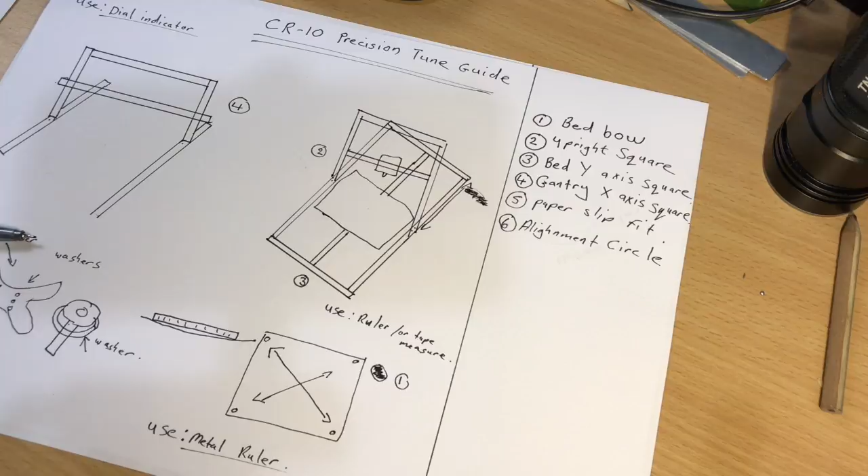Now there's a couple of things. I do have a CNC background. I've designed and built CNC machines, CNC routers, so I'm new to the world of 3D printing. This is my first 3D printer, but the same tolerances that apply in the world of CNC routing or CNC milling apply even more so to 3D printing, because here you're working with layers of 0.15 of a millimeter. So everything has to be just right in order to get perfect prints. So let me explain to you what I did, and hopefully this will help someone out there.

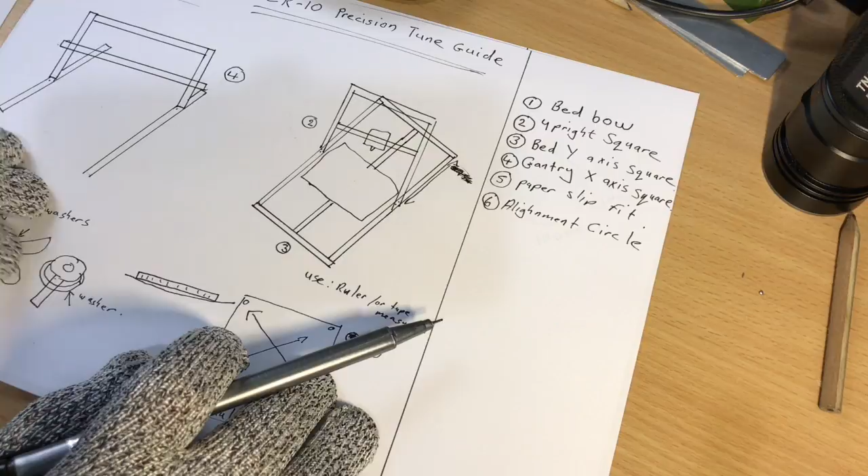So what happens is, when you get the printer, they're so popular that they're being put together very, very quickly and shipped out as fast as possible. So they're not paying much attention to precision of the machine when they ship it out. So that has to be tuned after the fact. Also, when you assemble the machine, you can't just assume that you're going to screw everything in and everything's going to be perfectly aligned. So you have to measure this. So let me go through all the things I did to fix the machine, and if you follow this list, I'm sure you will have a perfectly aligned machine capable of printing almost to perfection. So let's start with what I did.

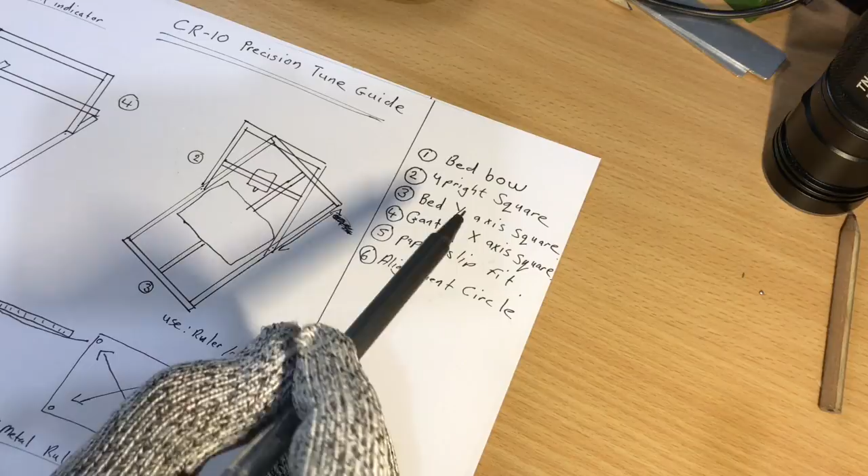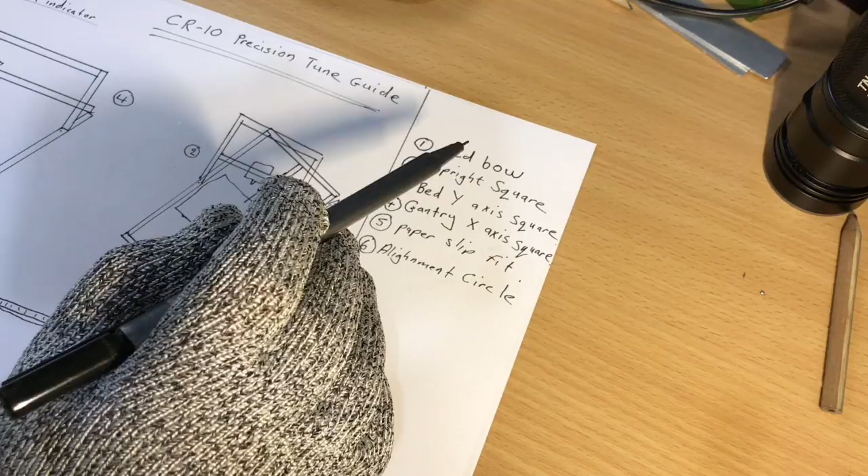Okay, number one, the bed bow. So I'm sure a lot of you have realized that the bed isn't flat, or you think the glass isn't flat, or you go out to buy mirror tiles. I suggest you use a mirror tile from IKEA because it's absolutely flat, but if your bed underneath it isn't flat, there is still going to be distortion on the bed when you use the clips. So it's very, very important that you get the bed straight.

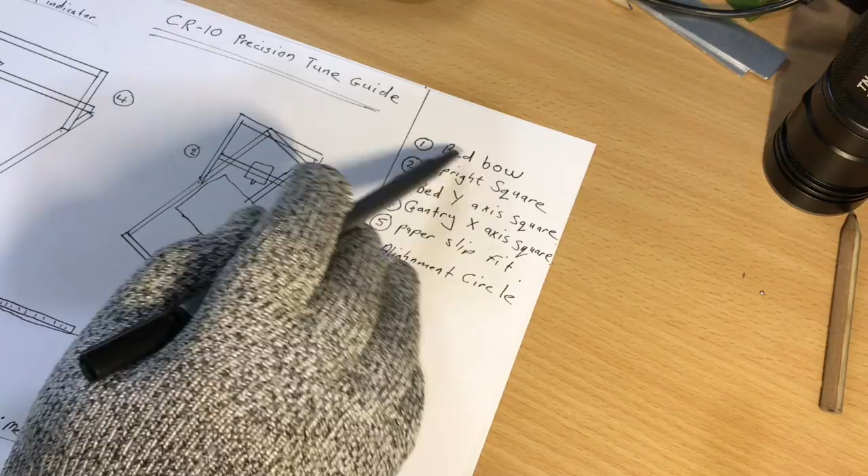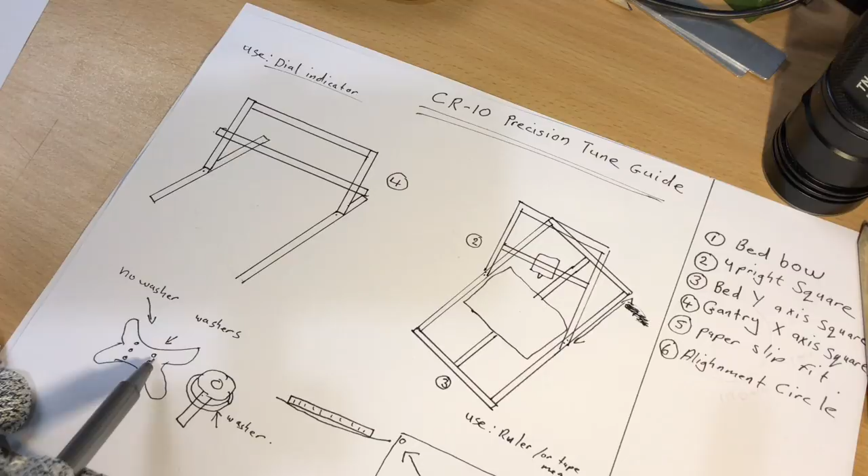So what I did is I first took off the aluminium heating plate, and I looked underneath, and on my machine, I'm sure your machine is different, but mine had been assembled so quickly. Underneath the plate there is this bracket that the rollers screw onto. I don't know if you can see that, but here's your center beam, and then you got your rollers underneath that screw onto it. Now on mine, there's 6 screws, 3 on the left, 3 on the right. On mine, there were no washers on the one side underneath the screws, and the other side had washers. So now you are introducing a little bit of imbalance into the system already. You got different tensions from different sides.

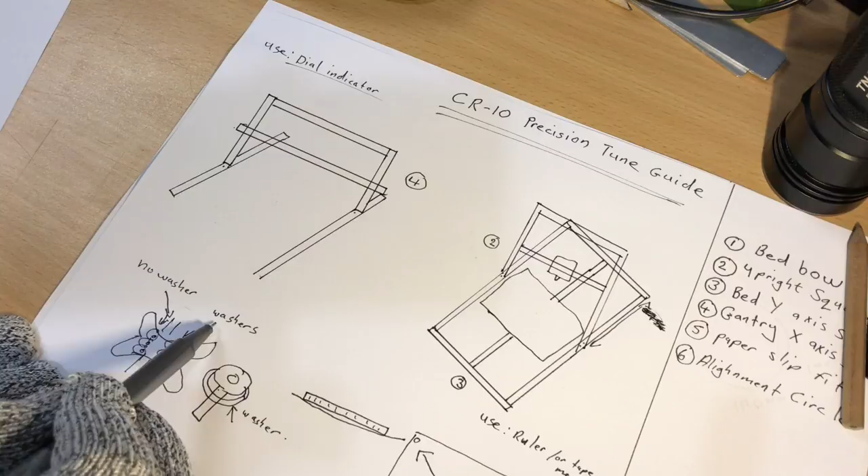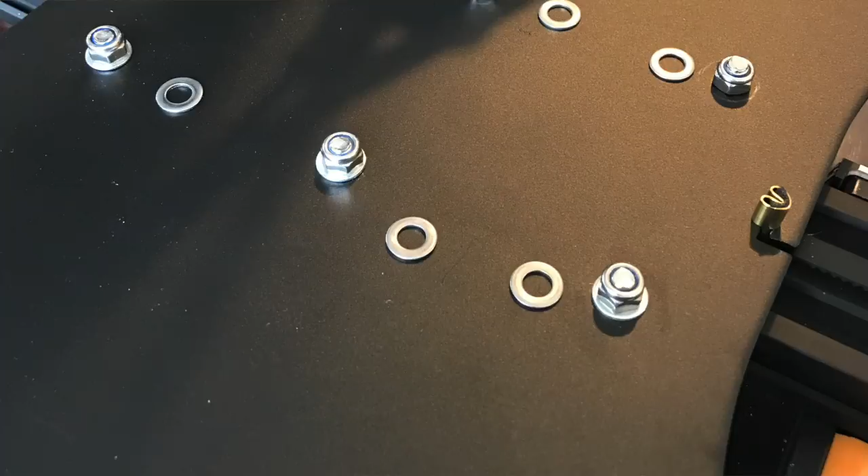So what I did is I just took the screws out. I got my own washers, and I knew they were all exactly the same size and height. And then I put washers under all of the screws, and I put it back on again. Then I moved on to, we'll do number 3 before number 2 actually. We're still on number 1, the bed bow.

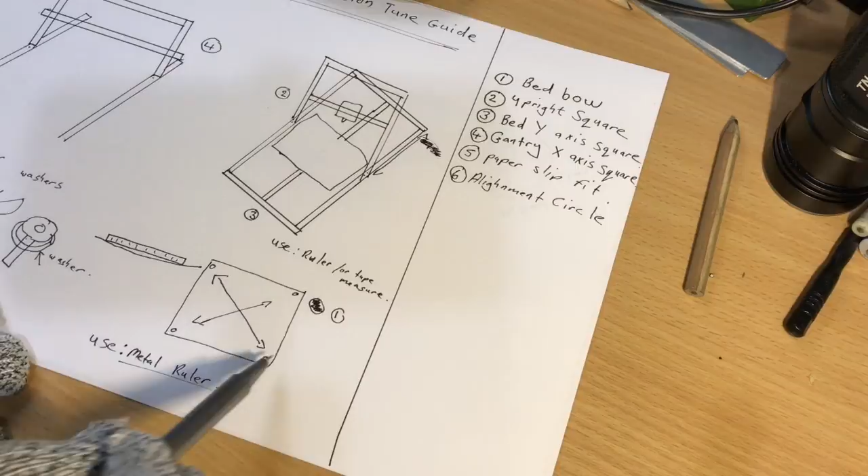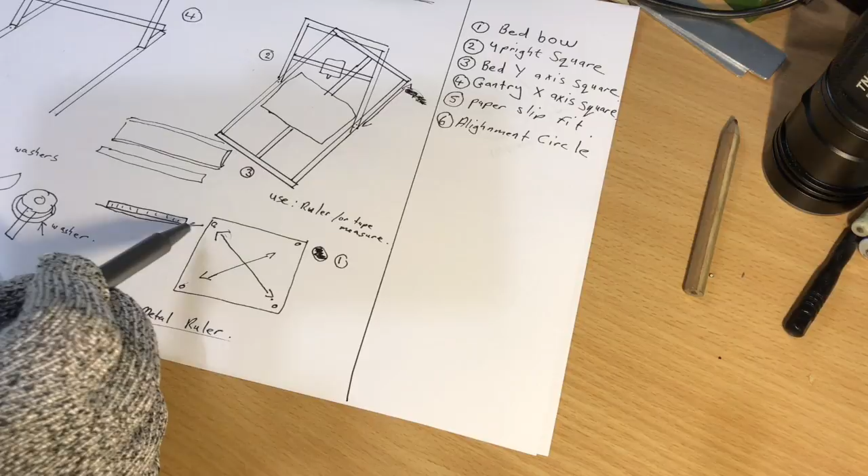So what I did is I put it back on, and then you take a ruler. It's a metal ruler that's perfectly flat, and you put it on its side, and you look for a gap underneath. You place the ruler, this is the way I did it, from one corner to the opposite corner, like that, and you shine a light underneath it, and I can guarantee you that your bed won't be flat. So you'll see that there's a gap underneath it, either like that, or you might actually see something like that, but probably the first one, because these screws over here have different tension. If one is putting more tension in one corner than the other, then you're going to have a distortion on the bed.

So what I did is I put a little bit of tension. I made sure that I turned the screw the same amount. So two turns, two turns, two turns, two turns to get a bit of tension into the system. And then I used the ruler test. And while the ruler was on the bed, I adjusted the screws until I saw that the ruler was touching the bed perfectly and there was no gap underneath. So that's what you want to see. And you want to see it in that direction and in that direction and in that direction. Then you know your bed is flat. Alright, so that's very important to do.

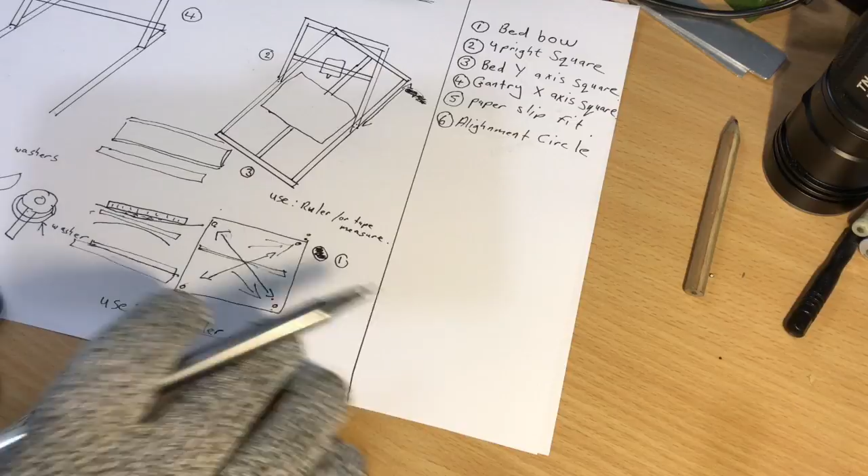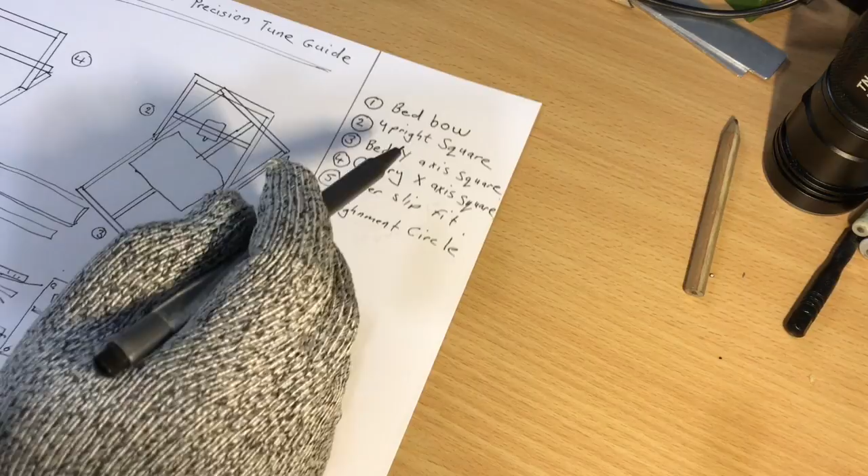Then I moved on to actually squaring the machine. Now I can't assume that this machine is square as it comes out of the factory. And so this is what I do. So number 2, upright square. So this upright over here is screwed in. You screwed it in yourself over there and over there.

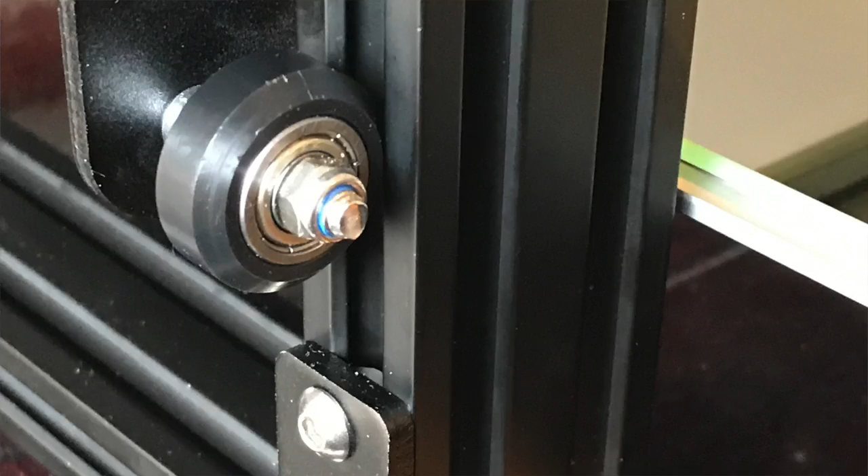And what happens is that here's the screw, and you of course are using your screwdriver from underneath and you're screwing the upright. So these holes aren't exactly perfect. There's a bit of slop in the holes. There's a bit of tolerance.

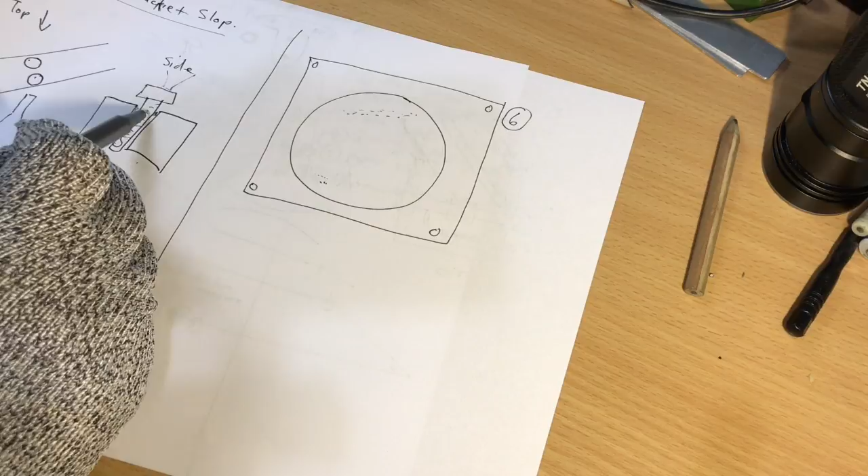So if you look at the holes, and this is the same for the brackets, if you look at the hole, there's a little bit of space on either side of the screw, and if you just happen to tighten this down, there's no guarantee that you're going to get this perfectly in the middle, and you're probably going to land on tightening a little bit more to one side or to the other. And the same with the brackets.

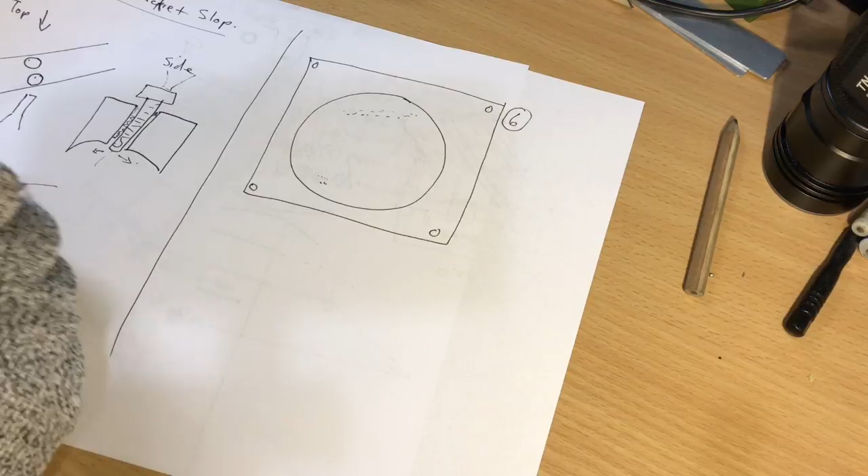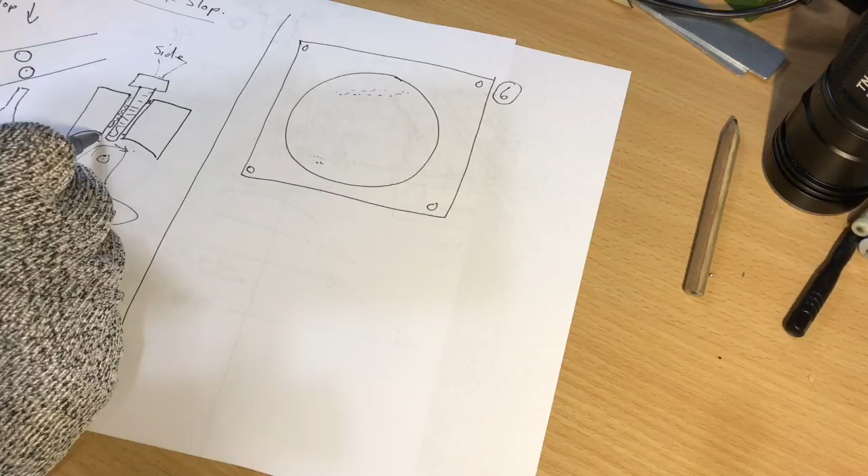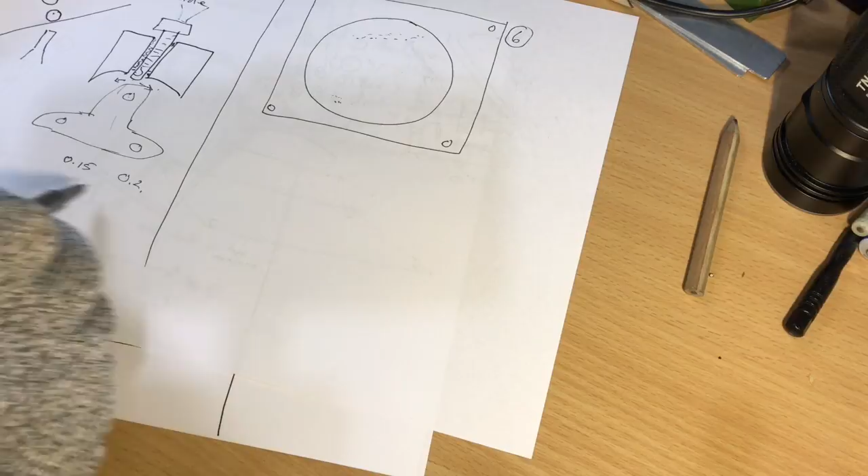So if you got your, just excuse my drawing, it's very crude, but there's your bracket, there are your holes, and the same thing happens on your bracket. So it's very possible when you put the machine together that you're going to have it one way or the other. Now, because we're working with very small tolerances, let's just say 0.15 of a millimeter, if this play here is 0.2 of a millimeter, that can throw your whole machine out, just not putting this in properly and getting it square.

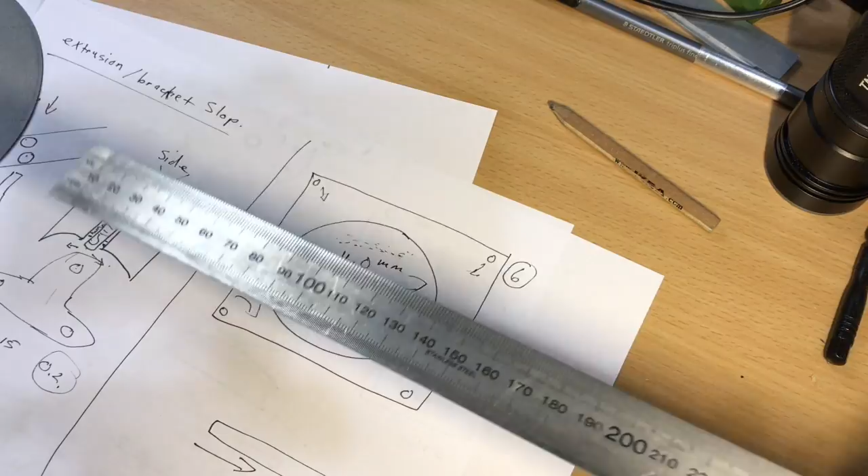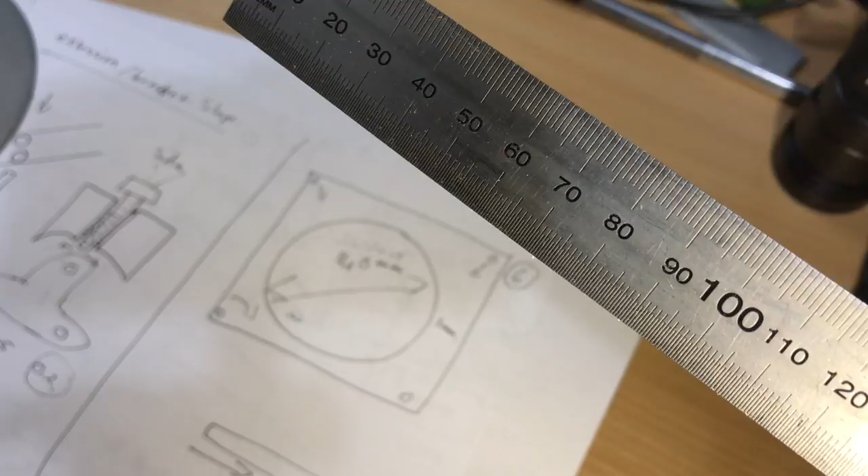So before I loosened the one side, I took a ruler, preferably a ruler that shows half millimeters on it. So this is the ruler I used. You want a metal ruler, and you can see here it's got half millimeter increments as well. So you want to use something like this that's flat for your bed, so you can see if there's a light gap underneath, if there's any bow in the bed, and also to measure the distances between the extrusions to make sure it's square.

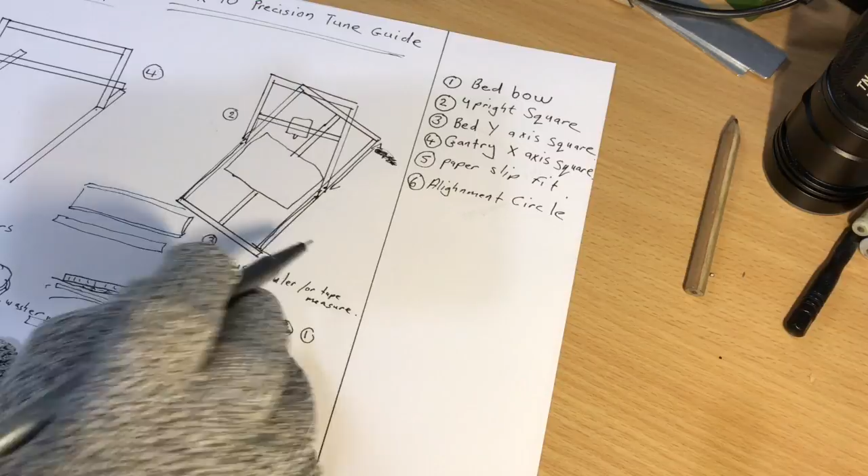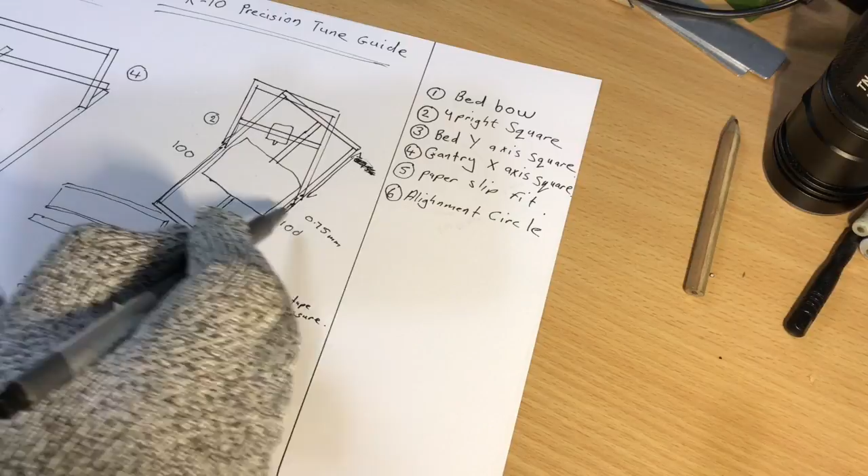And you want to measure the distance from the very edge of this extrusion, if you can see that over there, to the very edge of this upright on that side, and then on this side. And you'll take your measurement. So let's just say this is 100. You want this distance also to be 100. Whatever it is, you want them to be the same. Now on mine, I was out over here by 0.75 of a millimeter, which is a lot. So I fixed that, got them exactly the same distance apart.

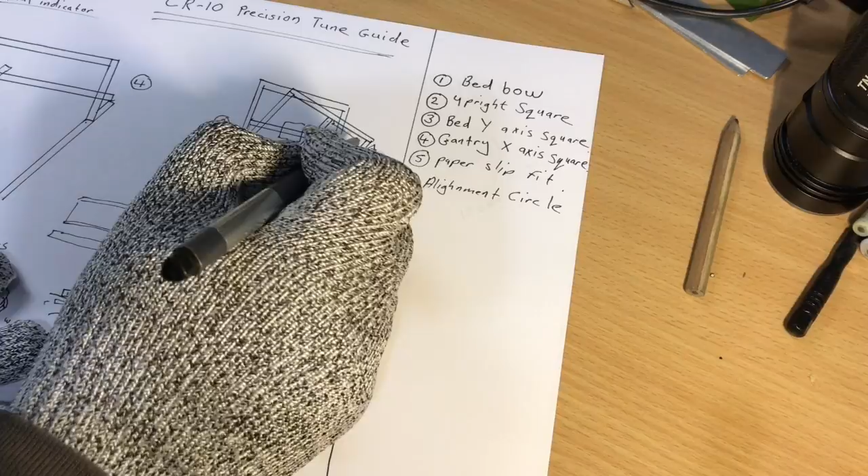And then I did the exact same thing from this middle beam to there, and the same thing on that side, middle beam to there, and let's say that was 50. You want that also to be 50. On my machine, mine was out by 0.83 of a millimeter, so I fixed that.

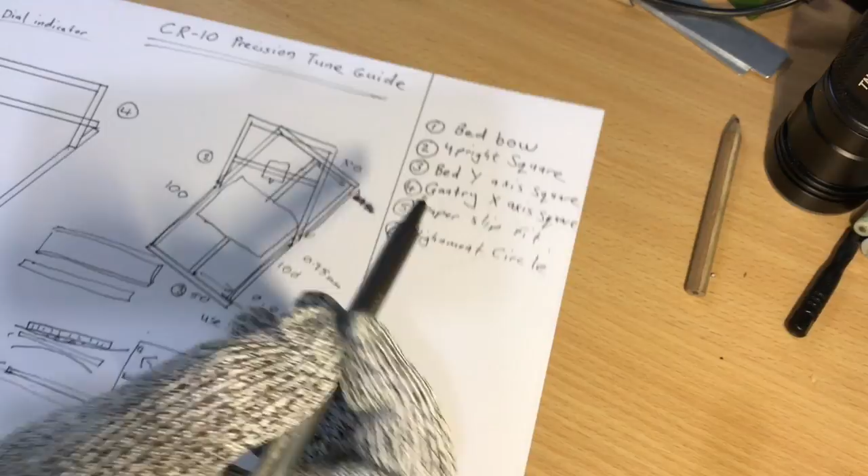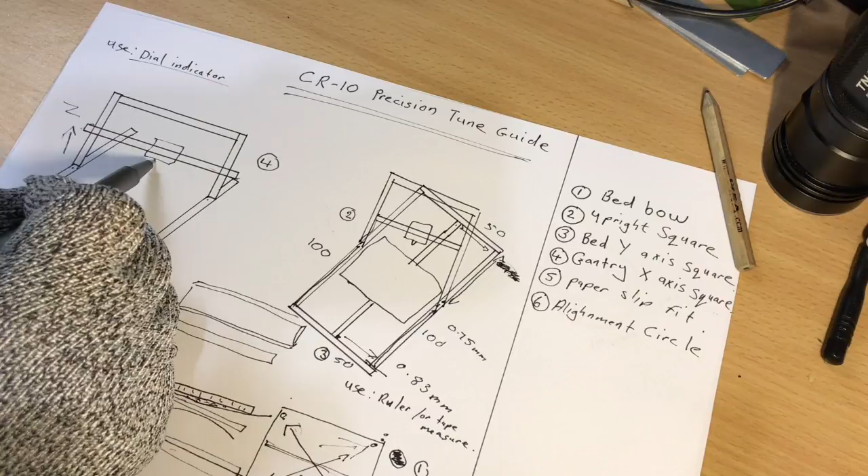Then the next thing you want to check, this is very, very important, is your gantry x-axis square. So over here you've got this beam that rides across, and this beam moves up for Z, and your print head moves left and right for X. And it's vitally important that this is parallel to your bed.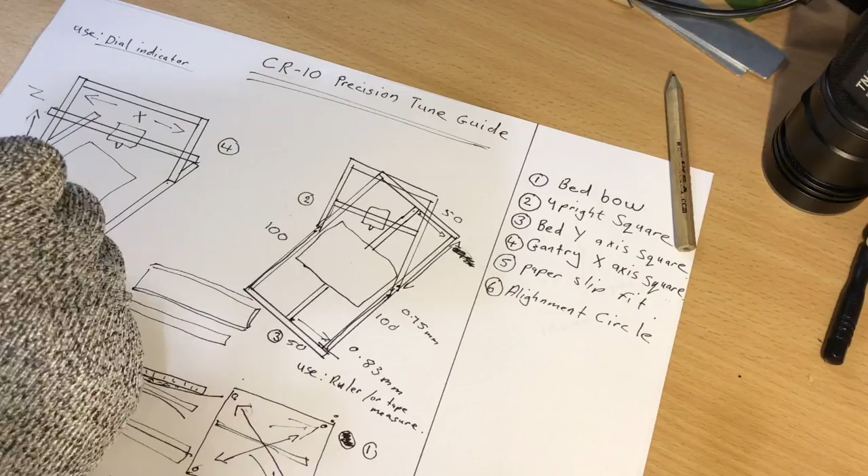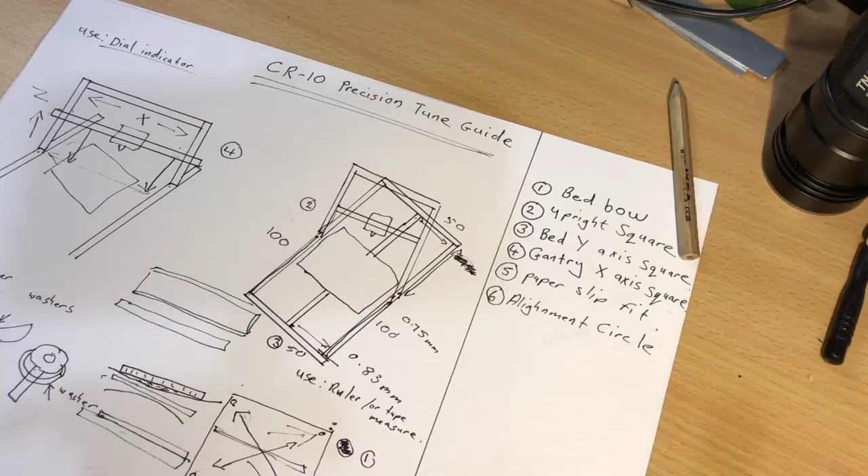So when this print head moves from here to here, and we've adjusted your bed to be flat, you want to have the exact same distance from there down to the bed as you have from there down to the bed. You won't be able to measure this with a ruler. The way you measure and fix it is with a dial indicator, if you've got a dial indicator.

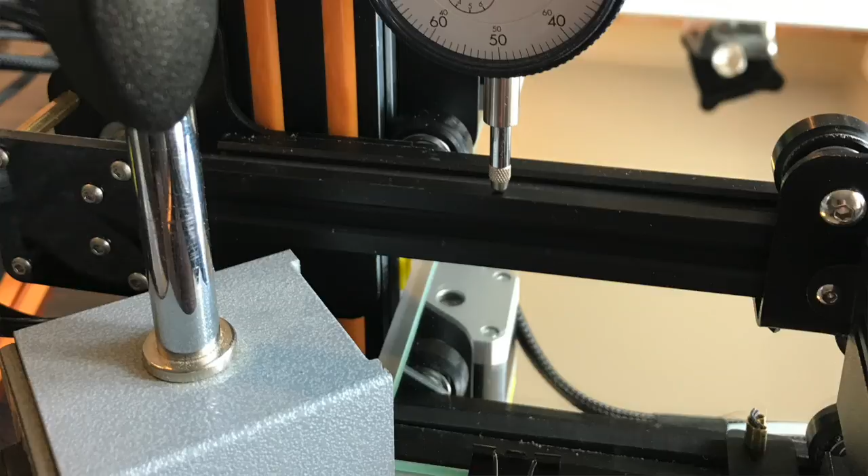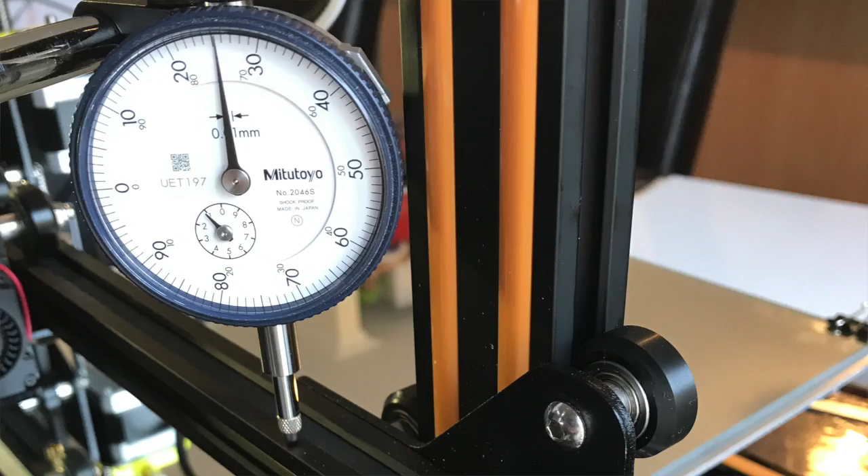So you put your dial indicator, they normally come with a magnetic stand. You can't use it on aluminium since it's not magnetized, but you try and strap it down with something heavy, or you position it where it's not going to move, and you put the block over here, and then you position however your stand works. Here's your dial indicator, and you put the needle on top of the beam, if you can see that, and you get a measurement on the one side.

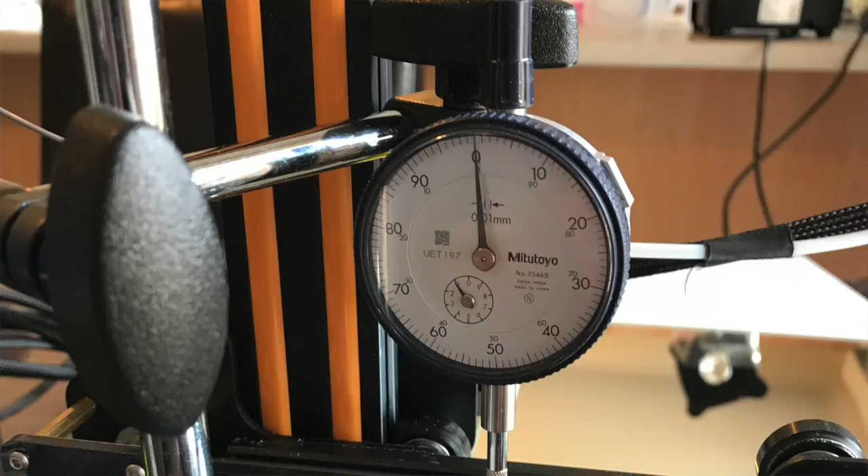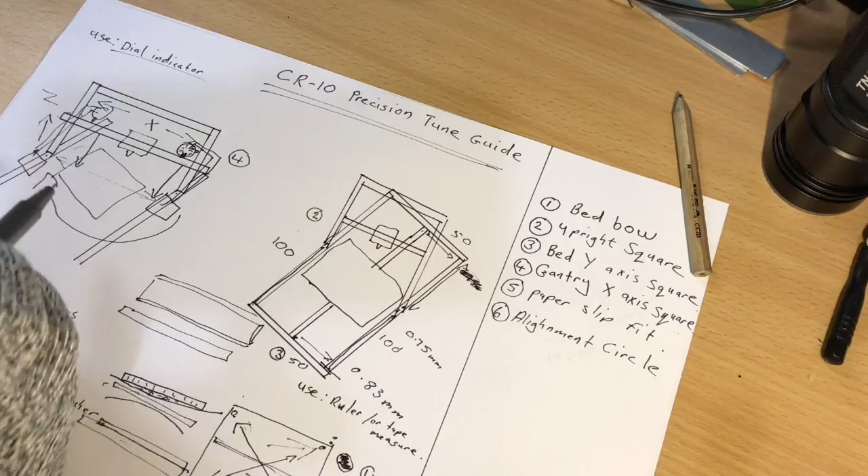So you put some tension on that needle, you zero out your dial indicator to 0, and then you take this same setup, you move it to this side, you put your dial indicator on this side, and then same thing. You see what measurement you get on this side. Now whoever assembled this machine at the factory was out by 1/5 of a millimeter.

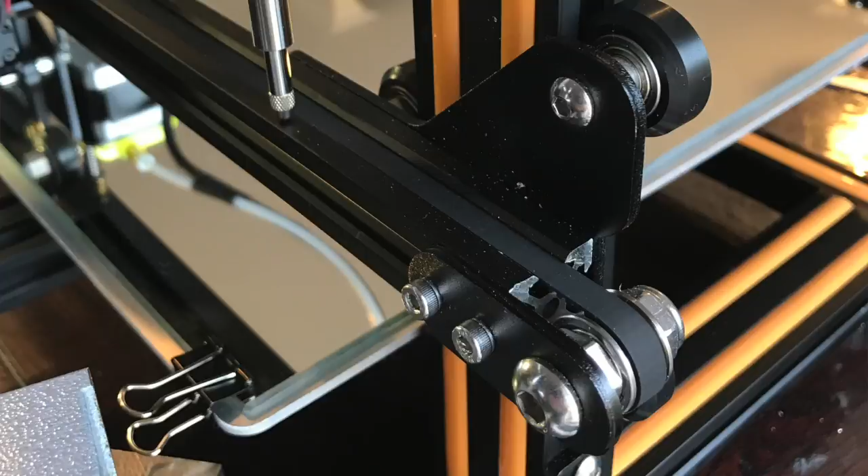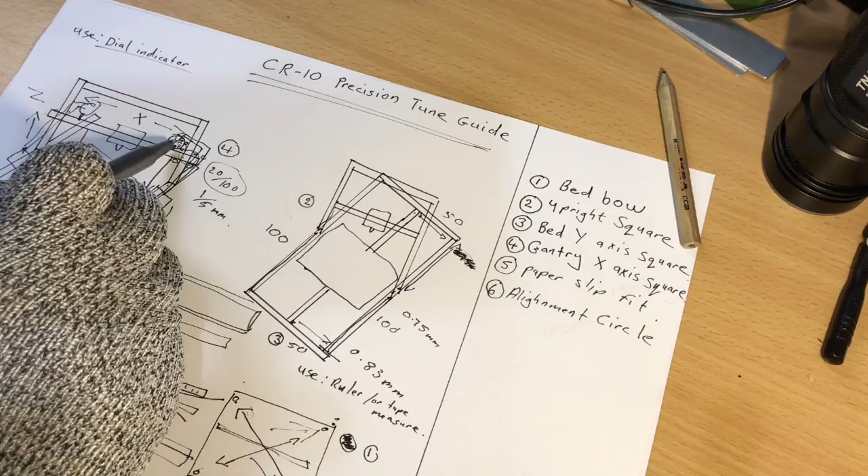So the way I fix that is on this beam over here, there's T-nuts that you loosen. There's 2 T-nuts and a bracket, and there's eccentric nuts for the wheels, and you basically get this into position. You tighten it semi-tight until you get this to 0, or as close to 0 as you can, and then you slowly tighten this up, each screw a little bit at a time, till you get this as close to 0 as possible. The best I could get these two in parallel was 5/100 of a millimeter. That was the best I could do on my machine.

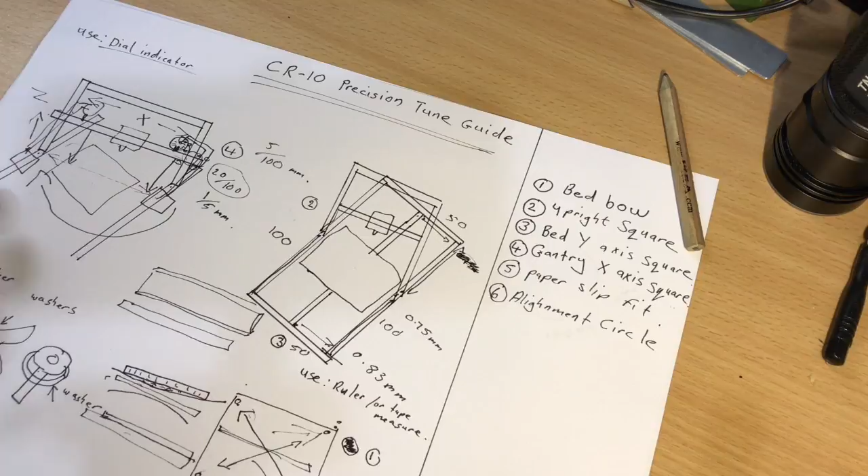You might have better luck on your machine. It all depends on how precisely the hole's been drilled through the aluminium extrusion, and the play in your bracket and your wheels that ride on the gantry.

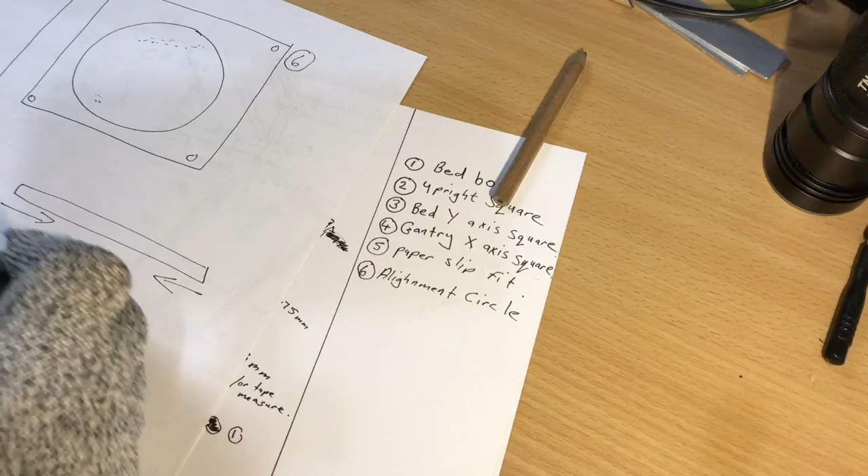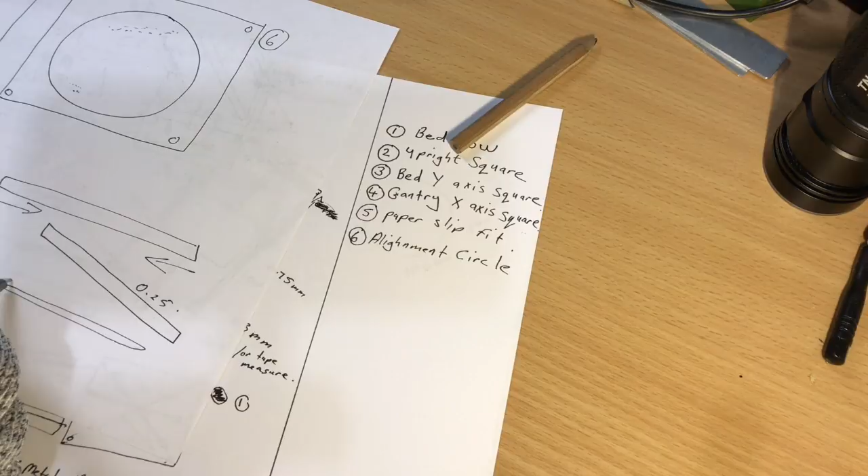If I've got layer heights of 0.15 of a millimeter, and you just draw it here, and here is the beam, and from left to right there's a slant like this, I'm exaggerating, of 0.25 of a millimeter, then when you're trying to put one layer on top of the other and the next one's coming down, you're going to land up with something like that. So that's vitally important that you fix that.

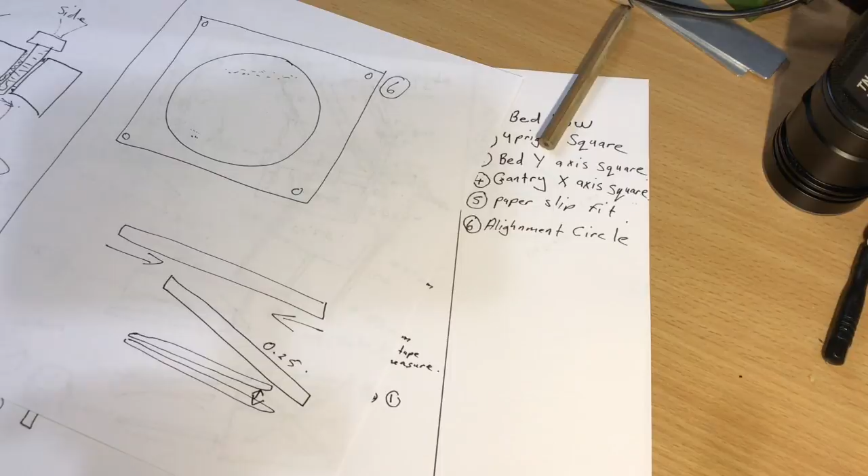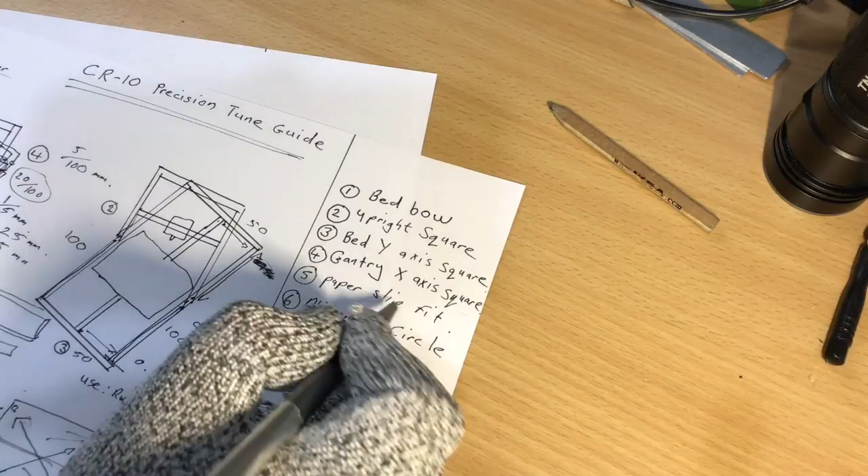Once you've done that, you do the paper test, which is you just make sure you got a bit of slip under each corner, and then you do your first print. You'll find that it's considerably better. This is just to give you an idea.

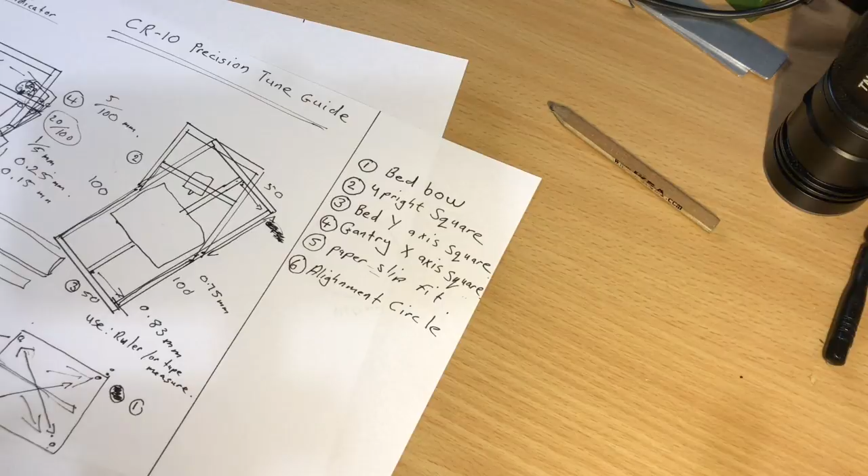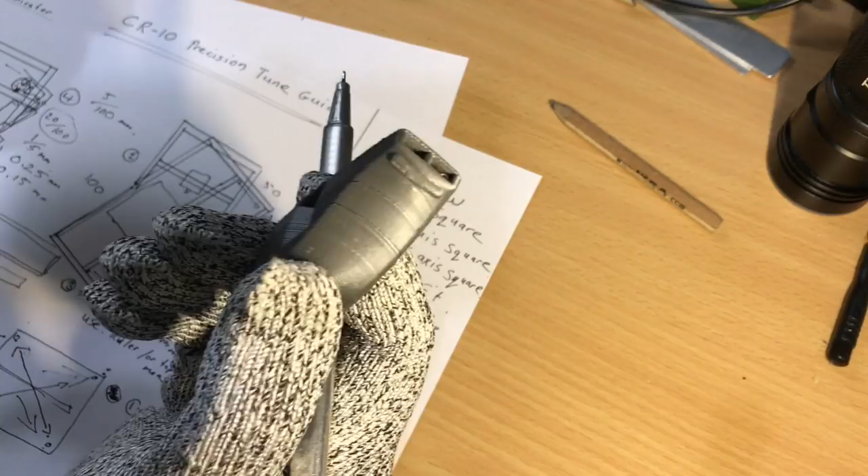This was after a day of trying to level the machine, the bed, before I did all of this. This is the best kind of print I could get. And using the exact same file after I did that, this is the print I got. So it's not perfect yet, because this is just the paper fit, but considerably better, right?

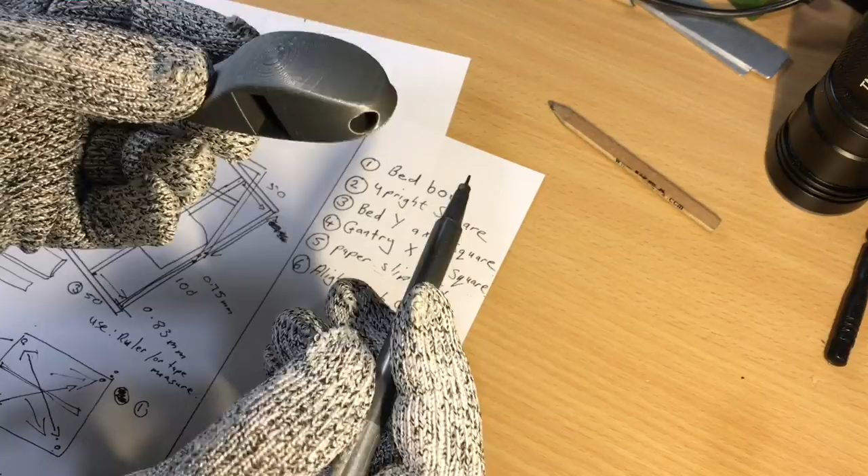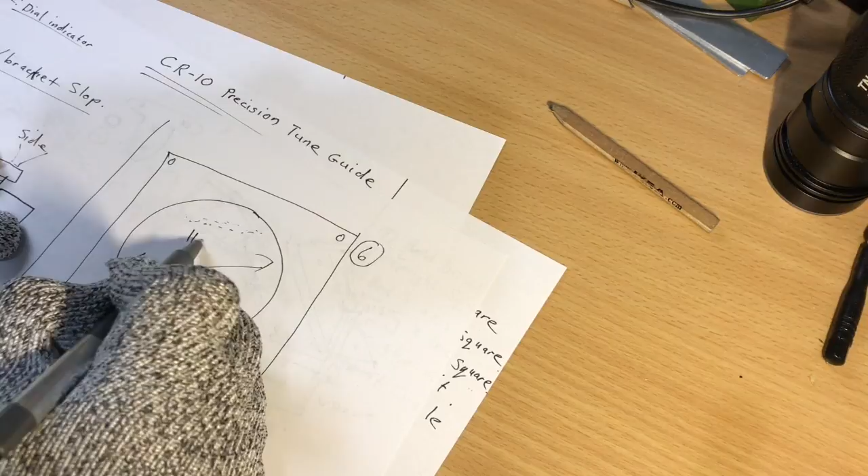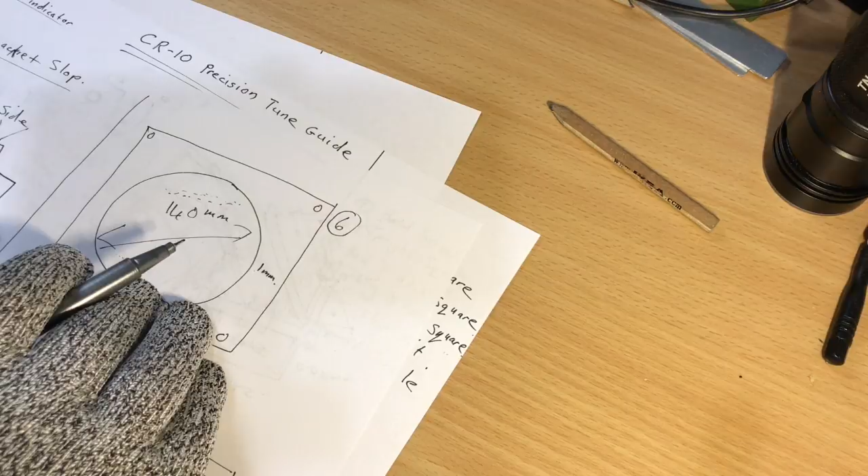Okay, then now you want to fine tune and get very, very, very good detail. Something like that. Okay, so what I did next is I went into Fusion 360. I drew a circle in Fusion of diameter 140 millimeters, and I extruded it up and made it 1 millimeter thick. Pulled this into Cura, and then I turned it into G-code, and then I printed this on the machine.

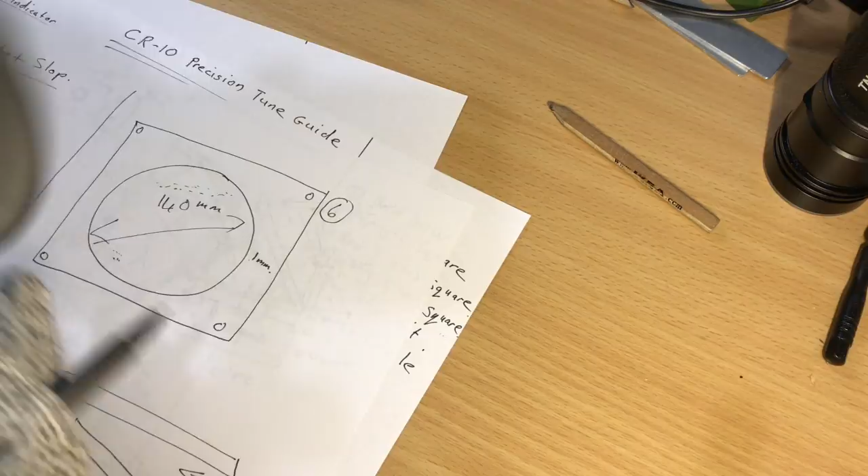And while it's printing, I watched it very carefully. So here it is over here, if you can see that. Okay. And while it's printing, you will see as it's going, so it's putting down 0.15 of a millimeter layers at a time, and you'll see very easily where your machine's out. So you'll see that, oh, there's a little rough patch over here.

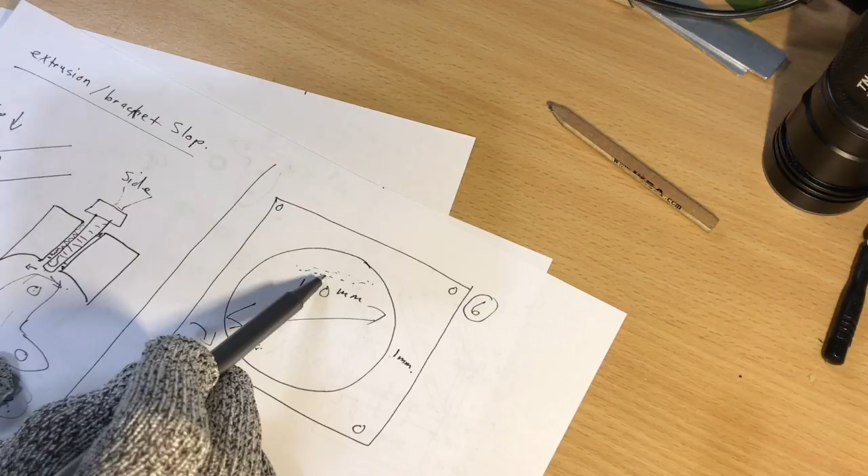It's the bed's too high over there, and you'll just tweak that knob, just one little tweak, and then patiently watch again, and you'll see, oh, okay, now it's put the second layer on top of the first, and you'll see, oh, there's a little bit of a rough patch over there, or you can see the plastic's getting a little bit transparent over there compared to somewhere else. Then you just tweak that screw and that screw, teeny little bits at a time, till you get it perfect.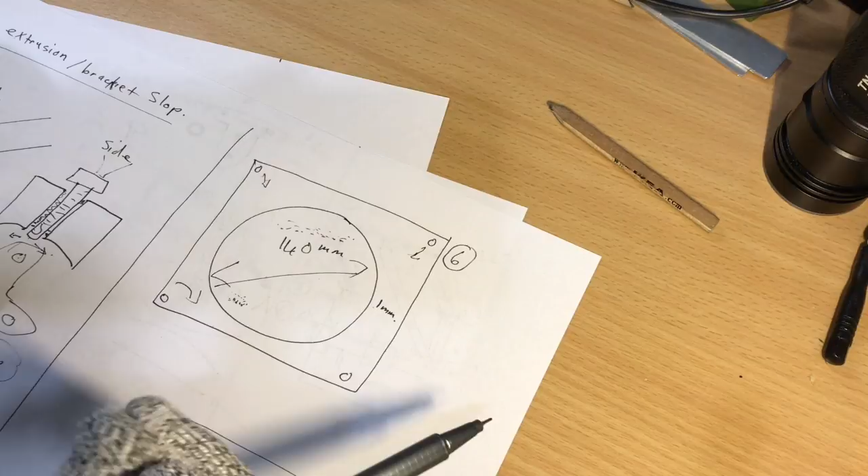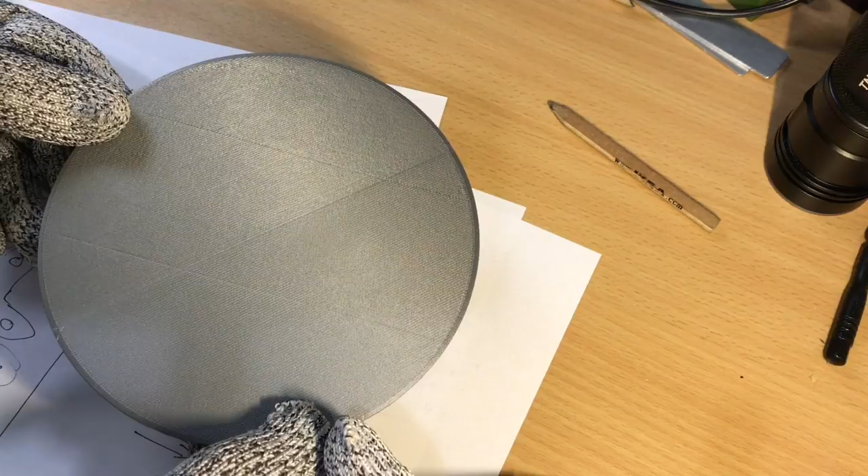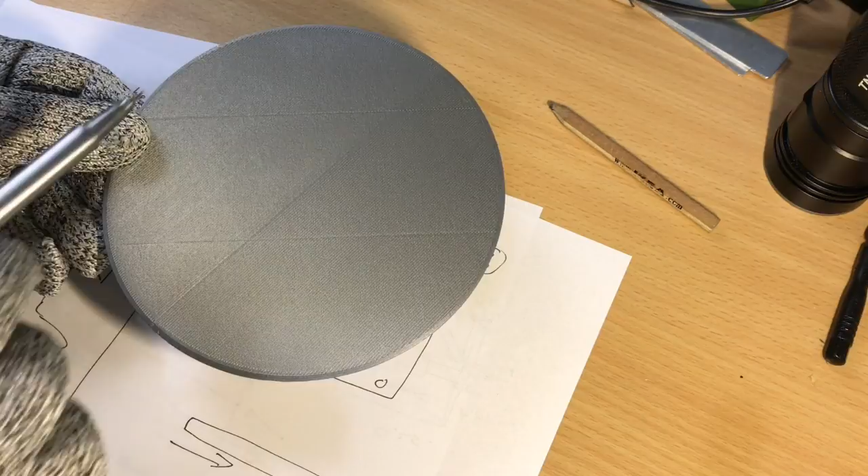You can rely on the feeling of your hands. The feeling of touch is very, very sensitive, so you'll feel any irregularities in the surface. And you can also rely on light. So you see this disc over here. As it's printing, you can look from a corner at an angle like this, from far away of the machine, shine a light, and the light will identify any irregularities on the surface. You'll see like a different shimmering pattern in one corner or another corner, and you'll know that there's something not quite right there.

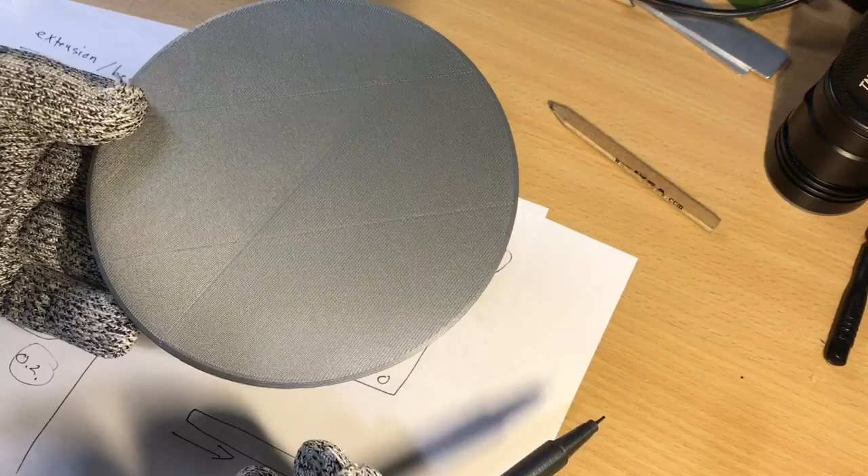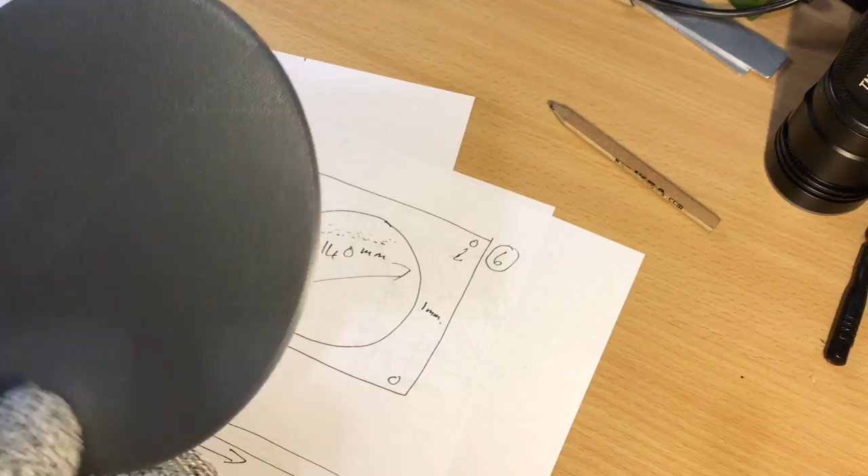And then that's what you get. So this is what I landed up with. This is the only thing I printed while the machine was going. You can see the marks from the tape underneath, the masking tape. And then this is perfect. You can't actually feel any difference on this at all. And you can use this to get your machine pretty darn close to perfect. And after that, you should be having perfect prints.

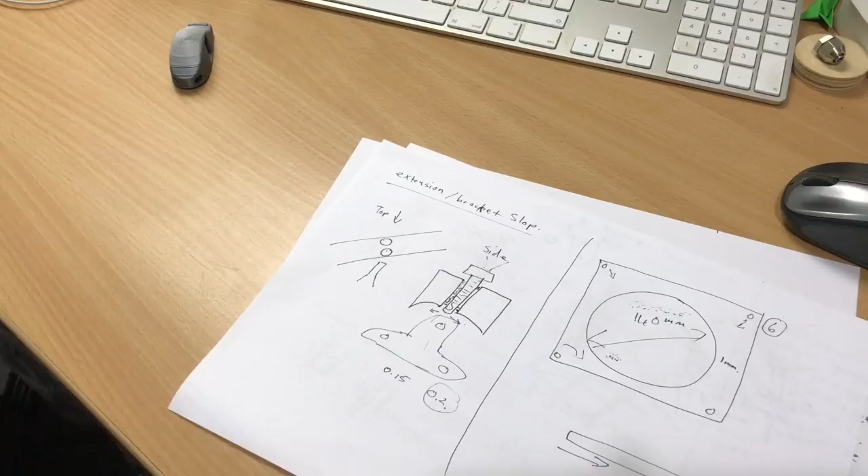Alright, so once your disc comes off the machine and you've tuned it, you want to make sure that your dimensional accuracy is correct. So if you recall, we made this 140 diameter by 1 mil thick. So you take your digital calipers, if you've got them, hopefully you do. So firstly we want to measure thickness. So we choose this spot to measure. We want to make sure that we miss the lip. We're just measuring the surface in the middle. You can see it's dead on 1 millimeter thick.

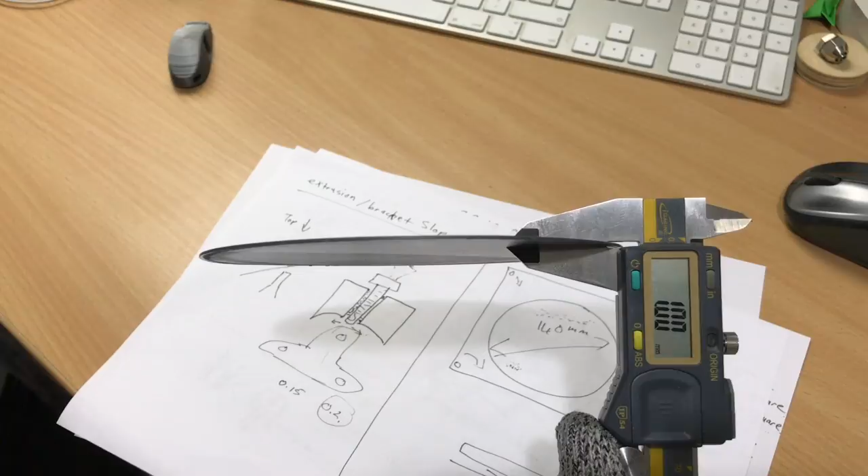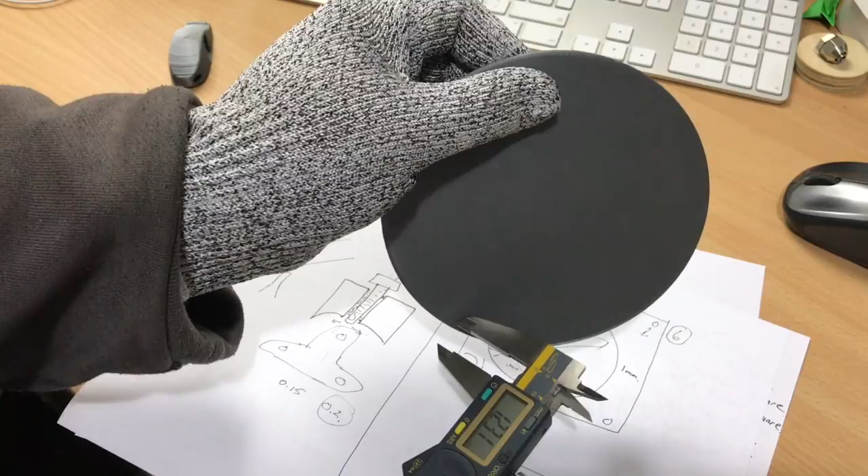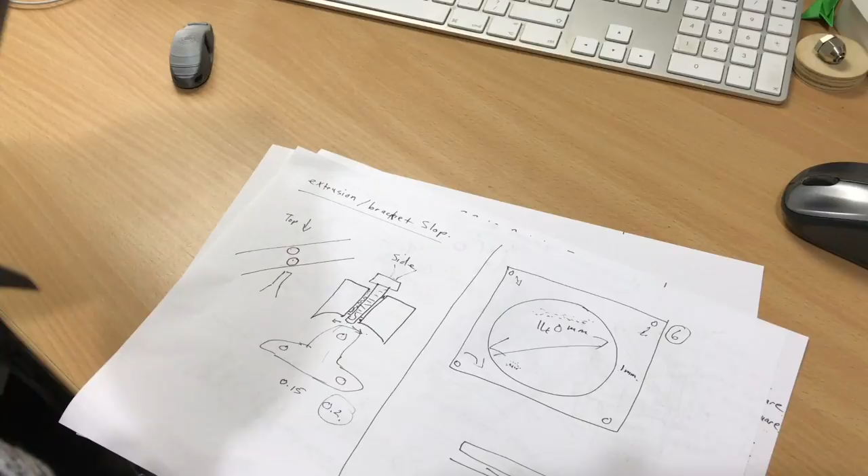Okay, so remember that is now many 0.15 layers on top of each other, and that's exactly 1 mil thick. For the diameter, that should be as close to 140 as possible. So let's try and open these nice and wide, and I will try and find the direct high spot across the circle. Just bear with me, it's not easy to do.

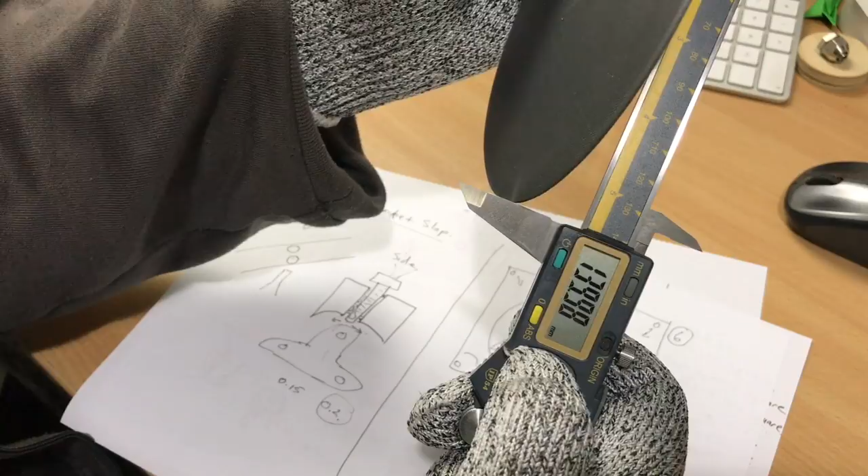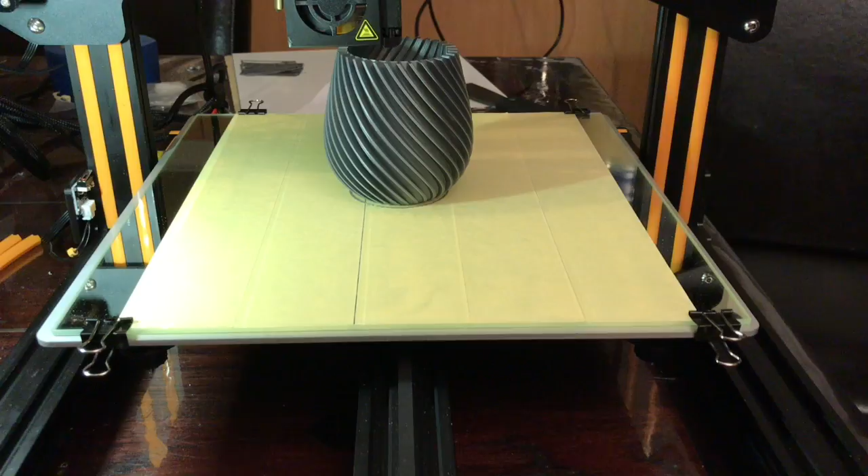Okay, there we go. I don't know if you can see that. 139.80, which is pretty much perfect. I mean, I don't think I can ask for better than that. That's pretty impressive. Alright, so once you've done that, you got those results, you can be guaranteed that your printing is going to be perfect every time, providing you use the right settings in Cura or whatever you're using as your slicer.

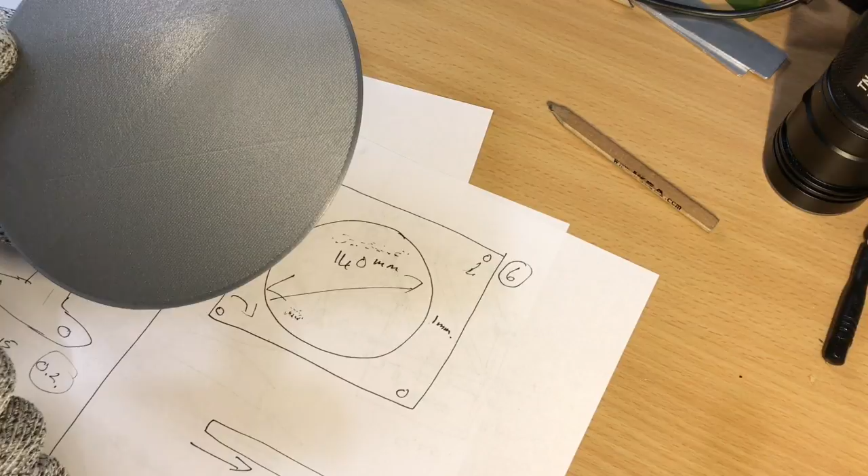All right. Well, I hope that helped someone, because that's what I did, and it worked like a dream for me. And let me know if it works for you as well.